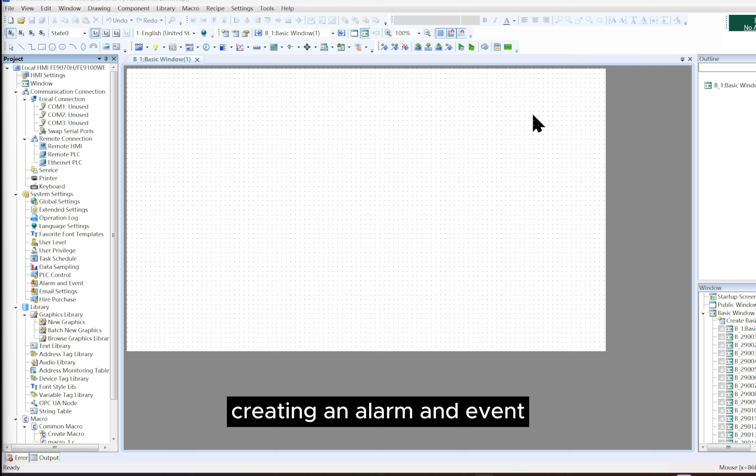Creating an alarm and event. Navigate to Settings, System Settings, Alarm and Event from the menu bar, then click Create in the pop-up dialog box. Configure the relevant parameters in the pop-up Alarm and Event Detailed Setting dialog box.

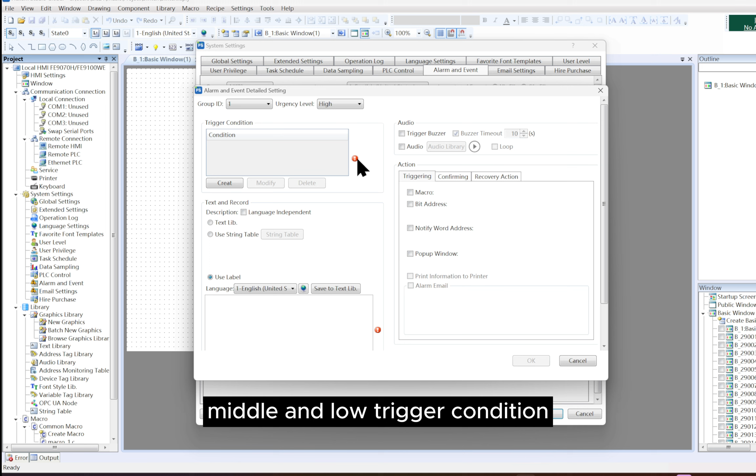Group of alarm and event. There are 64 groups in total. Urgency level includes high, middle, and low. Trigger condition. Click Create to add a new logic condition. If there are multiple logic conditions, you need to set the relationship between them.

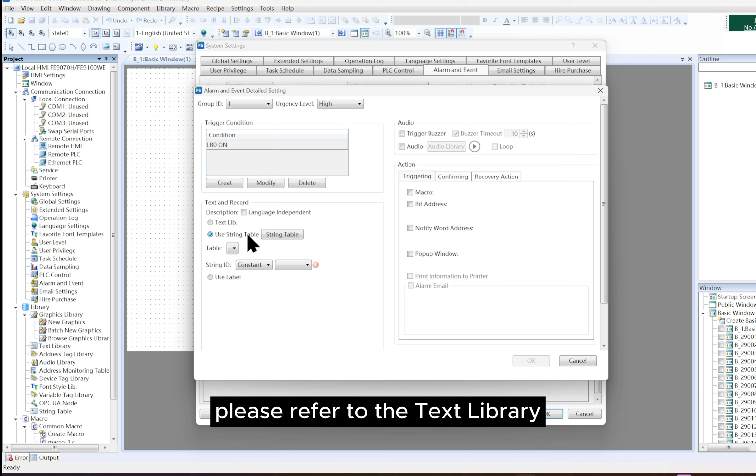Language independent. Text and record content is independent of language. Text lib. Use text from the text library. For detailed information about the text library, please refer to the text library. Use string table. Use the text content from a specified string table. Click String Table in the pop-up dialog box. Click Create Table to create a new table and set the content of the strings. Use Label. To use labels, you need to set the label content, and you can set the label content in different languages.

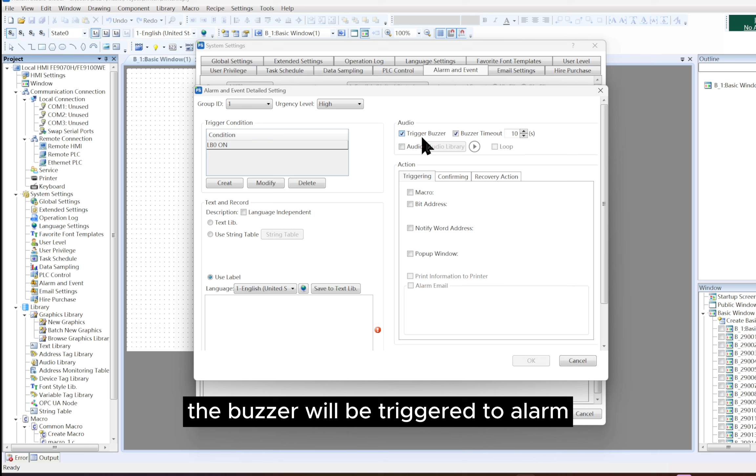Trigger buzzer. When the trigger condition is met, the buzzer will be triggered to alarm. The following parameters can be set. Buzzer timeout. Stop the buzzer when the set time is reached. Action. Set the actions of triggering, confirming, and restoring the alarm.

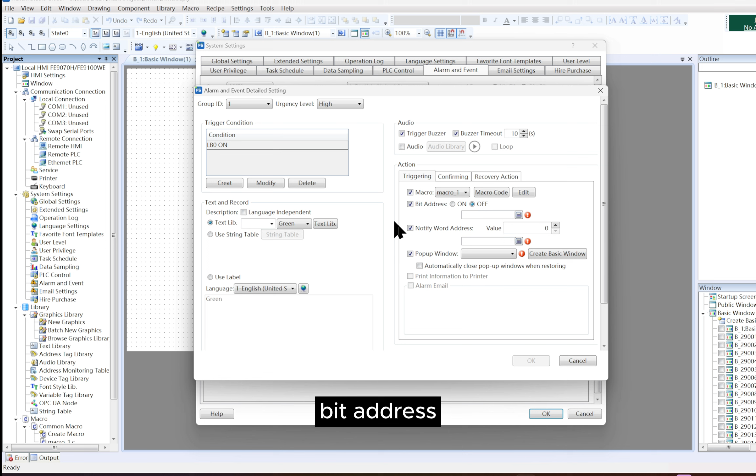The actions include trigger macro. Execute a specified macro instruction. For detailed information about macro, please refer to macro. Bit address. Set the value of a specified bit address to on or off. Notify word address. Set the value of a specified word address to a specified constant. Pop-up window. Pop up a specified window. Finalize by hitting OK. Exporting an alarm and event.

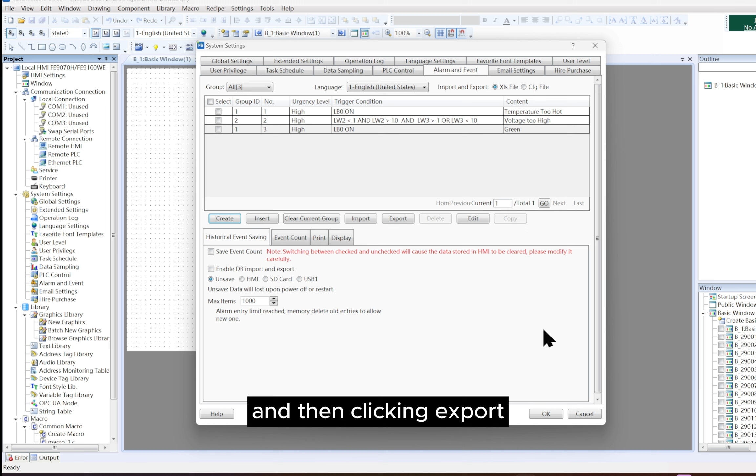You can export the added alarm and event by selecting the Import and Export file format and then clicking Export. Importing an alarm and event can improve the efficiency of creating alarms and events. Follow these steps. Select the Import and Export file format, then click Import. In the dialog box that appears, select the edited file, modified based on the exported file, then click Open.

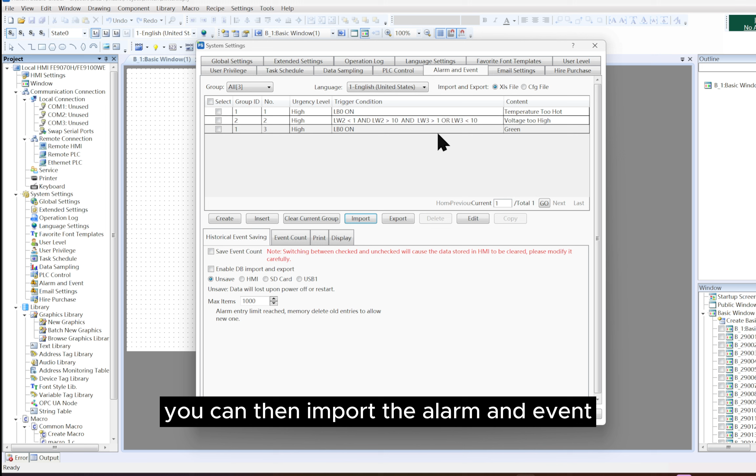In the next dialog box, select whether to delete the current alarm registration. You can then import the alarm and event. Click OK. Navigate to Settings, System Settings, Alarm and Event in the menu bar, then set Historical Event Saving in the dialog box that appears.

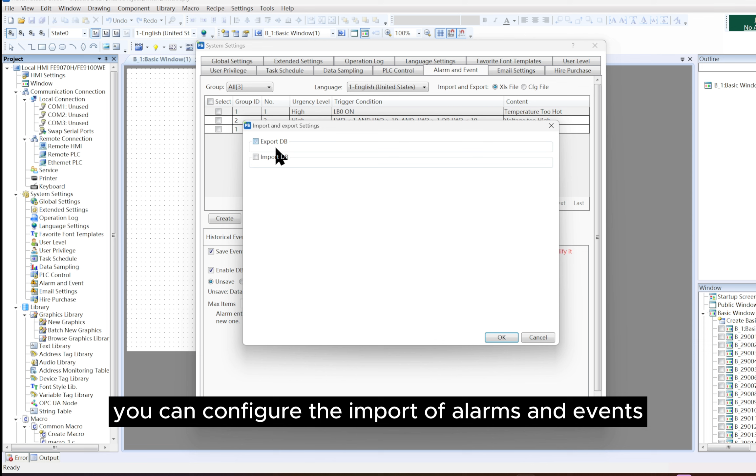Save event count. Store the number of times events occur. Enable DB Import and Export. By checking this option and clicking Setting, you can configure the import of alarms and events from a specified path or export alarms and events to a designated storage device such as HMI, SD card, or USB storage device.

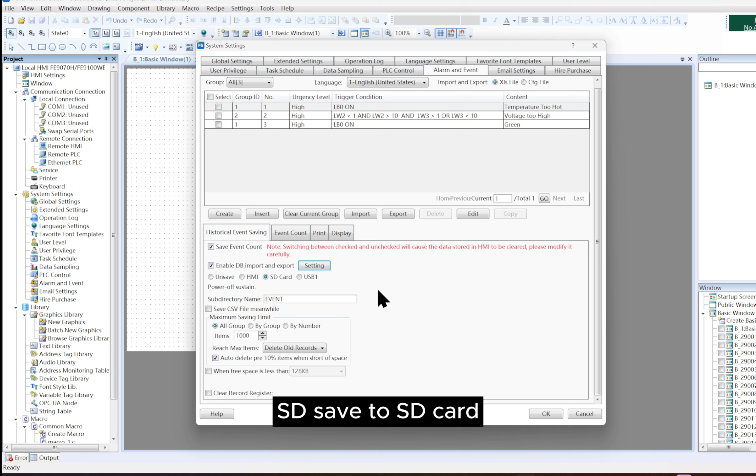Unsave, stored in memory, lost when power off. The maximum number of entries stored in memory can be set. HMI, save to HMI storage device. SD, save to SD card. USB, save to a USB storage device connected to HMI.

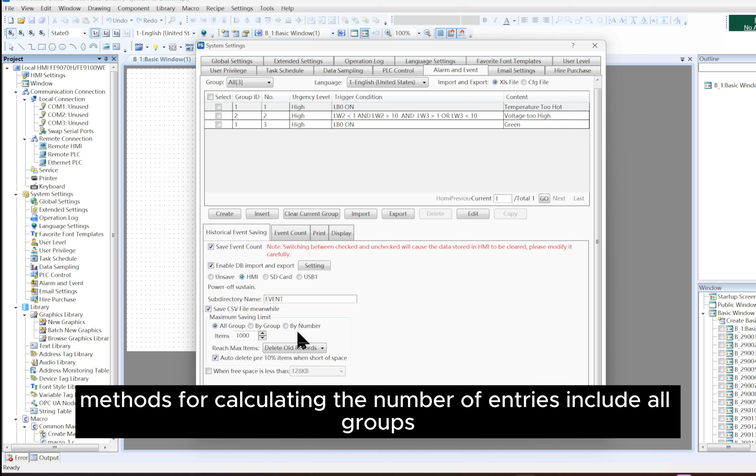Subdirectory name, export alarm and event historical data to a designated subdirectory. Save CSV file, save alarm and event historical data in a CSV format file. Maximum saving limit, the maximum number of entries stored. Methods for calculating the number of entries include all groups, entries of all groups, by group, entries of the specified group, and by number, single alarm and event.

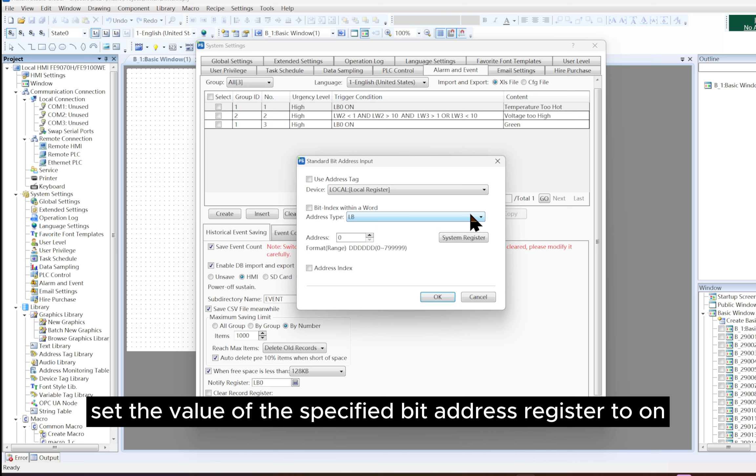When it reaches the maximum limit, delete old records, delete the old records, and discard new records, stop adding new data. Notify register when the remaining memory is less than the specified value, 128 KB by default. Set the value of the specified bit address register to on.

Clear record register. When the specified bit address register is set to on, the action of clearing the history record of the alarm and event is executed. After successful execution, the bit address is automatically reset to off.

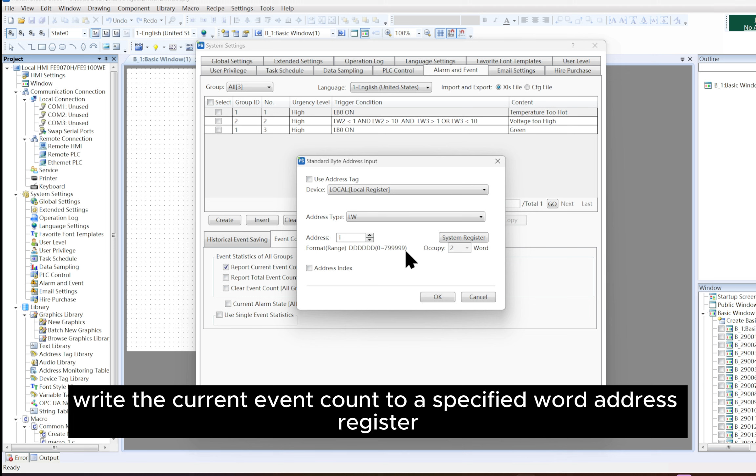Set the event count. Refer to the table below for detailed configuration methods. Report current event count. Write the current event count to a specified word address register. Report total event count. Write the event count to a specified word address register. Clear event count. When the value of the specified bit address register is set to on, the accumulated event count is cleared, resetting it to 0.

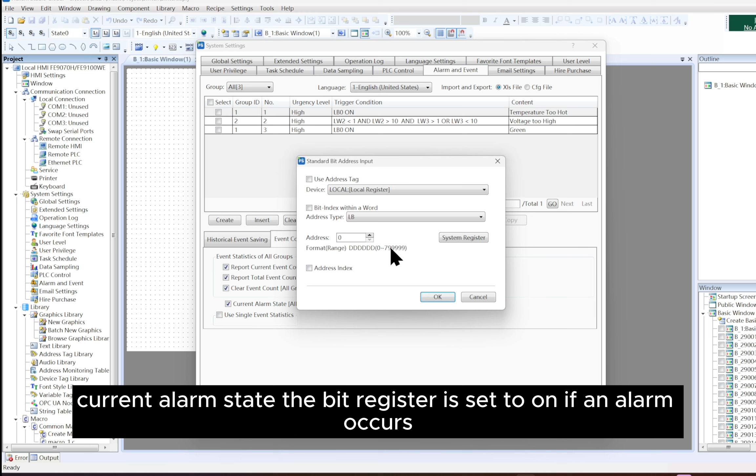After the clearing operation, the bit address register is automatically reset to off. Current alarm state. The bit register is set to on if an alarm occurs. If no alarm occurs, the bit register is set to off. Total trigger times. Use the specified word address register to record the cumulative occurrence count of individual events. Total continued time. Use the specified word address register to record the cumulative occurrence time of individual events.

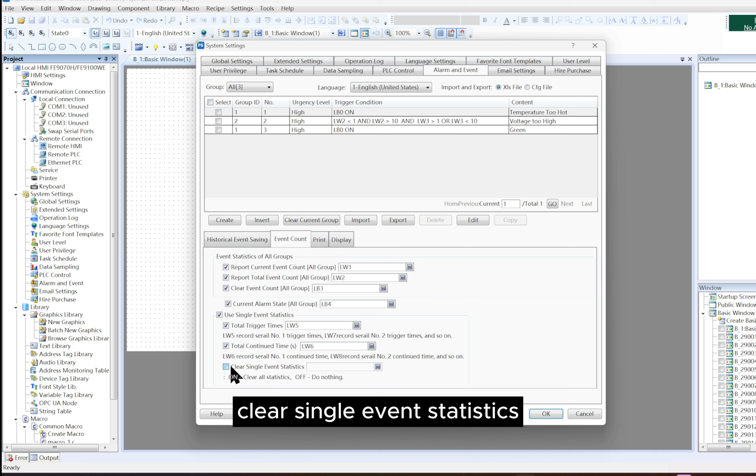Clear single event statistics. When the value of the specified bit address register is set to on, all statistical data for individual events is cleared. Print event. Refer to the table below for detailed configuration methods. Is event auto print? Automatically print event information when an event occurs. Print as character. This parameter must be selected in order to print successfully.

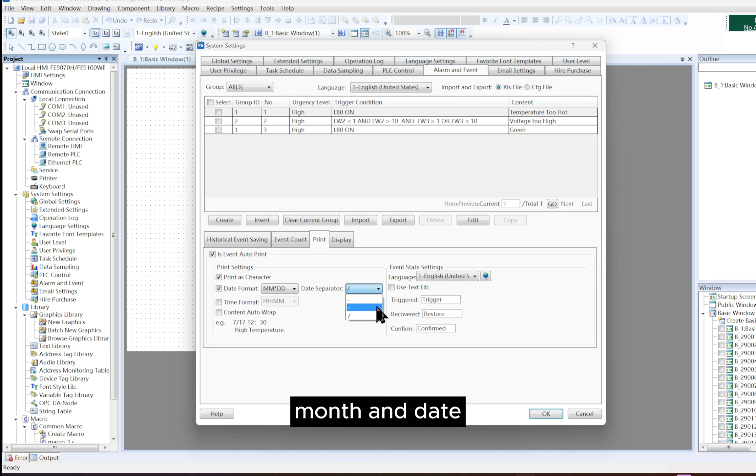Date format. Format of the event date. Date separator. Used to separate year, month, and date, including time format. Format of the event time. Event state setting. Set the text information for the alarm event state. You can set different texts for different languages and different states: triggered, restored, confirmed.